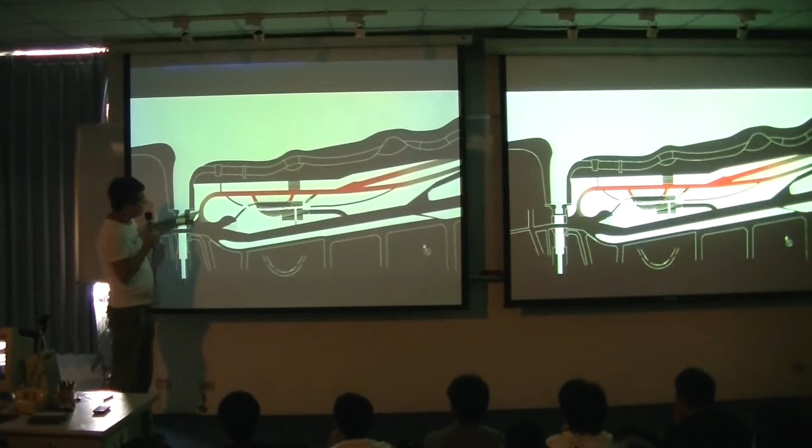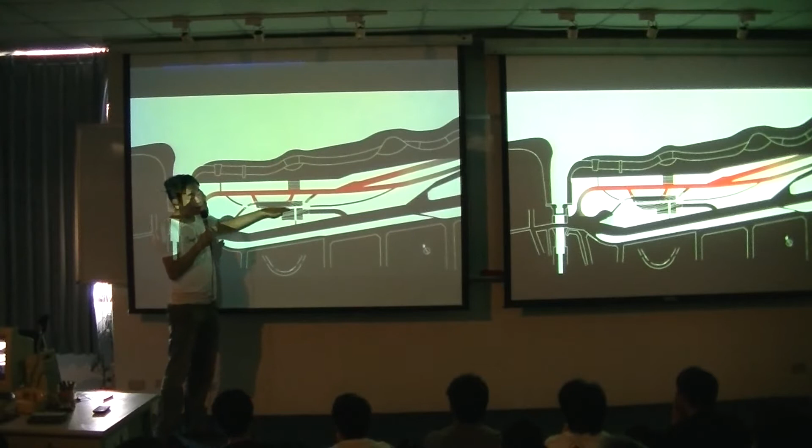My idea is, this is Kitakami River and this is Kitakami Canal. So my idea is that the building is like a tunnel. Usually a building is a box, but in this case the building is a tunnel in the ground. Our goal is to create a continuous experience.

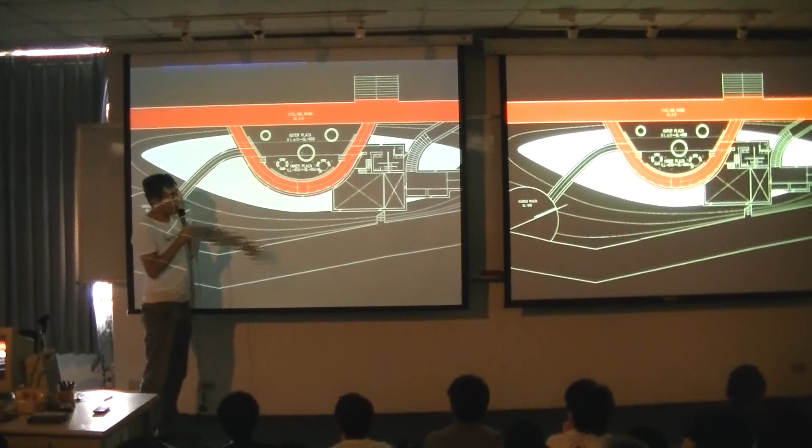This is the tunnel we designed. This is a section of Kitakami rivers as a town. This area was almost destroyed by the tsunami. This is the entrance to the building, though it is very difficult to find. This is the bottom of the tunnel.

I love the beauty of this place. In the Tohoku area, the still nature is existing. We designed very big windows, and half of the furniture is outside while half is inside. This is the view from the Kitakami River.

The next project is the water/glass villa in Shizuoka, 1995.

The beginning of the story is this wooden box, designed by a famous German architect named Bruno Taut. Do you know Bruno Taut? He came to Japan.

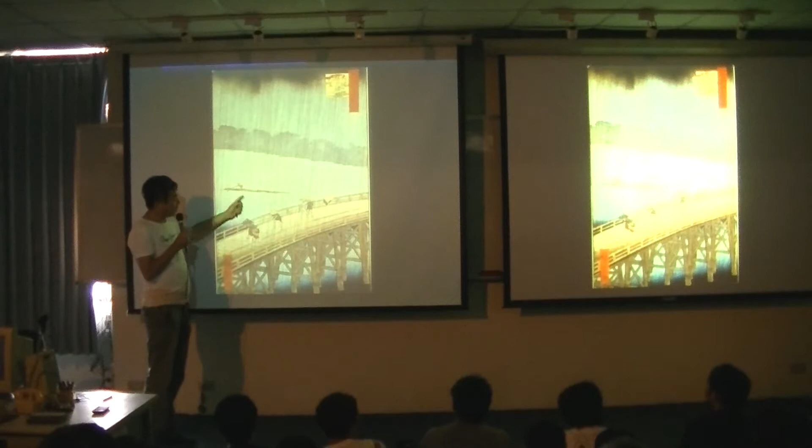The next project is the Hiroshige Ando Museum, completed in 2000. This is a masterpiece dedicated to Hiroshige, the ukiyo-e painter, and many artists wrote about his wood block prints.

One example is Vincent van Gogh, the Dutch impressionist painter, who wrote about Hiroshige and was inspired by him. He wrote that Hiroshige's method was very different from the Western method.

In the Western method, three-dimensional space is created by perspective drawing, but in Asian painting, three-dimensional space is created through layers of transparent, flat images. There's a big difference between Western painting and Asian painting.

Also, Frank Lloyd Wright, the famous American architect, was a collector of Hiroshige's wood blocks, and he learned the concept of transparency from Hiroshige. This is an example of how Vincent van Gogh traced Hiroshige's ukiyo-e painting.

In my Hiroshige Museum, I wanted to realize his idea of transparency, superimposed juxtaposed layers, that kind of thing.

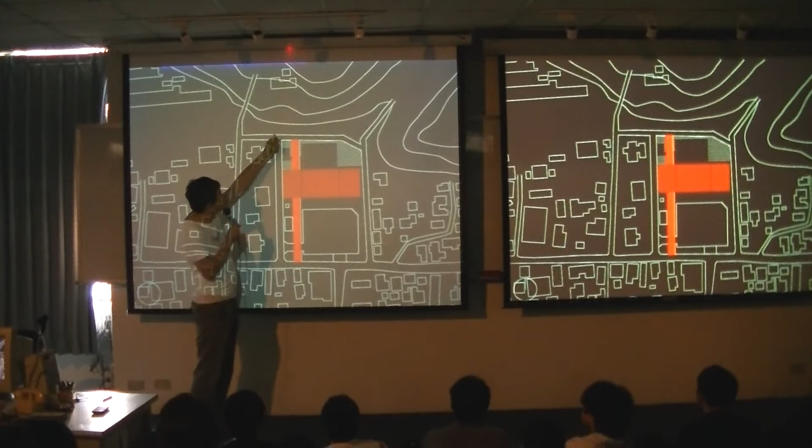This is the plan. This is the center of the village, and this is a mountain and a shrine. The village, mountain, and shrine used to be deeply connected, but in the 20th century that relationship was cut, and people forgot the existence of the shrine.

That's why we invited the vegetable market into the project.

Recently we wanted to adapt this method to a different context, the European context. This is a project in France, in Besançon.

This is the site with some existing buildings. Our proposal is to preserve the existing buildings and just add a wooden roof to cover the space.

The planning is very simple, similar to other projects. The main space connects nature and the city. The materials are local materials; in this case, it's wood from the forest.

FRAC Marseille is a contemporary art museum in Marseille. This is the site.

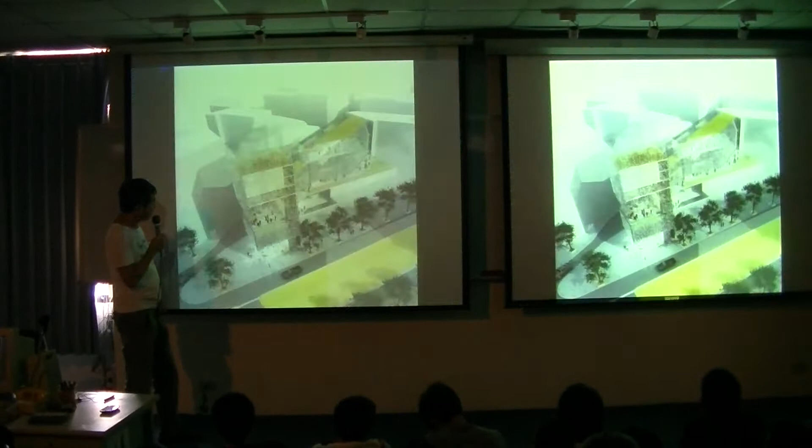Again, the material I found in the city of Marseille, in a factory. This is the material I found in the city - recycled glass. It's not expensive.

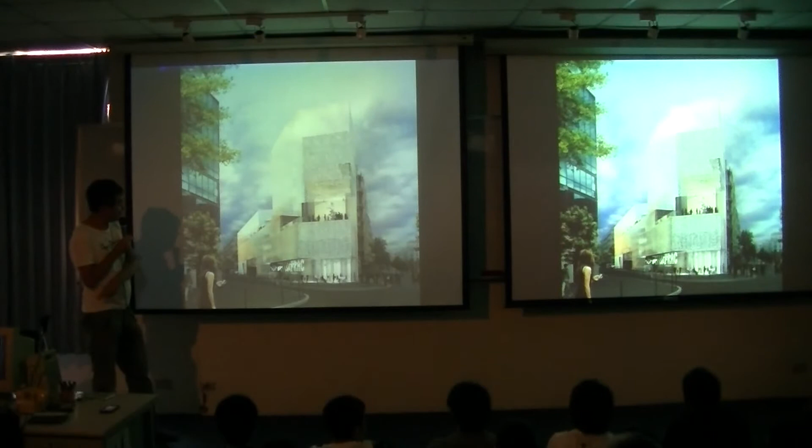The idea is very simple. The building is a vertical street, a spiral street, and that spiral street is covered by particles of recycled glass. This shows the spiral part.

Another material used, in an Italian project, is volcanic stone.

This volcanic stone is very soft, and if seeds of plants land on it, vegetation naturally grows from the stones.

This is a quarry, and the quarry itself is beautiful. I wanted to bring the beauty of the quarry into the building, and naturally people can get plants growing from the stone.

This is a structure made from the stones, and the Italian craftsmanship by the stone workers is really amazing.

Next is a project in Spain, Granada, a performing arts center - an opera house in Granada.

The inspiration came from the fruit. Granada is the name of the city, but at the same time it's the name of this fruit.

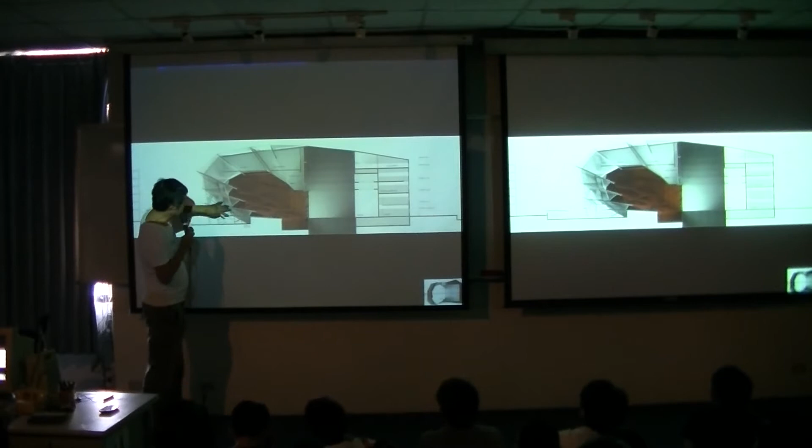These hexagon elements support the whole building and are exposed both to the exterior and the interior.

The basic idea is a 1,500 seat auditorium, where small spaces for 50 seats are combined together to create the full 1,500 seat auditorium.

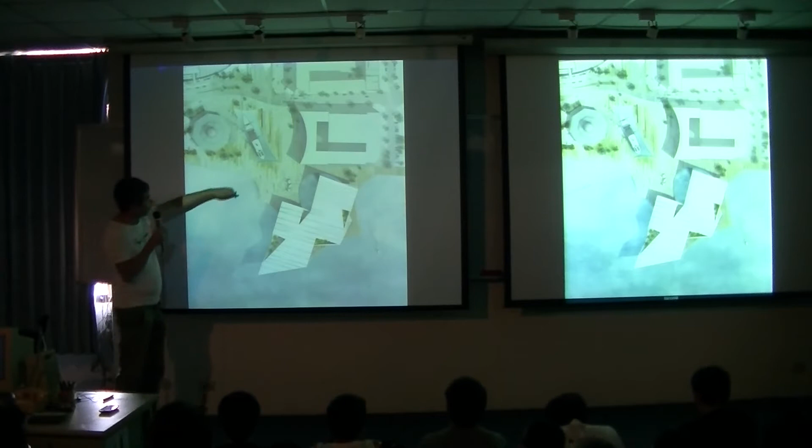The most recent project we won in Europe is the Victoria and Albert Museum at Dundee, Scotland. This is a first sketch, this is the site. The client is very ambitious, so they decided to use the river for the site of this project. This is a city, this is a river, so they chose this site.

Our idea is that the geometry of the building in the rivers should be different from the normal 90-degree geometry. This is again a hole, a void, which connects the river and the city. The same idea as the Busan project, and same idea as the Bamboo House and the Hiroshige project, all the same idea. The central void is the connector of the environment.

For the material, in this case, we are inspired by the masonry projects of Scotland. To use real stone is impossible, it's too expensive. So we use stone powder combined with precast concrete, and precast concrete forms the structure of this building.

This structure is exposed on the interior, and it is not decoration. This is the structure of the building itself, and it can be used as a bench and can be used for the stairs as well.

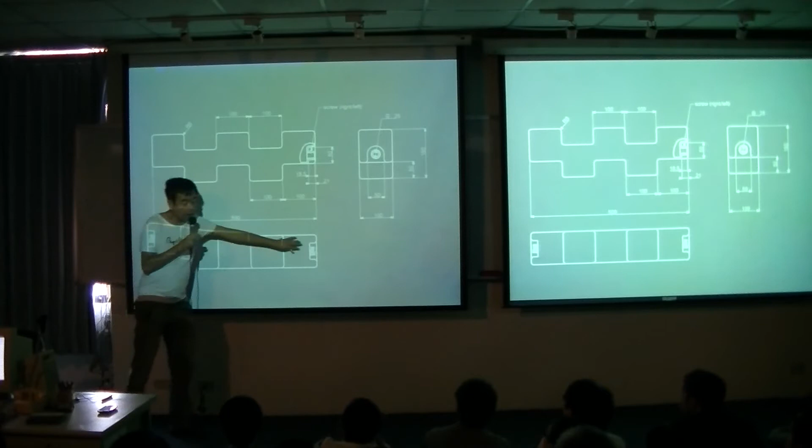The good thing about the water brick is it has two valves on both sides, so we can get water flowing into the pipe. That means the water flows into the wall and the floors. This is from the New York exhibition.

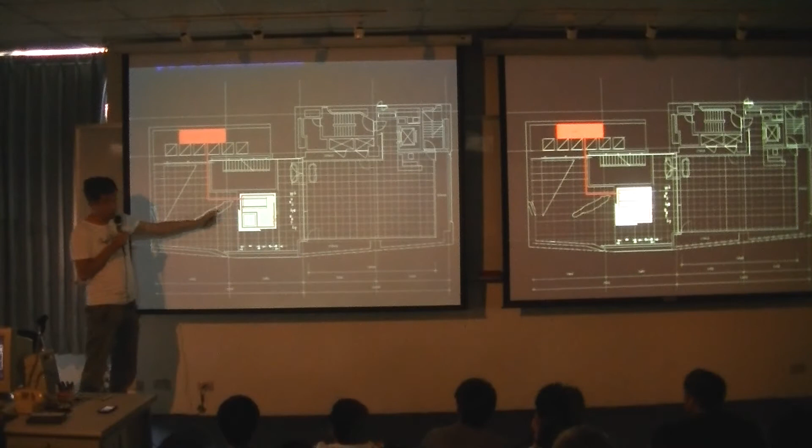Finally, we built this water brick house in Japan as an experimental house. It's a heat collector outside, and the water circulates into the house, into the walls and floors. Usually in a normal building, the structure is structure, the piping is piping, and the finish is finish. But in this house, the structure is at the same time the pipe, the water circulating space, and also the finish - it destroys the division of structure, finish, and piping.

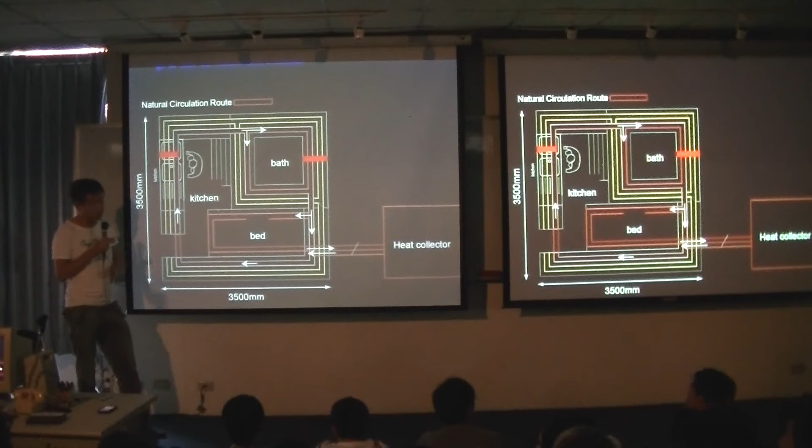Our students are working very hard. Each block is connected by these pipes. Finally, we build the house.

This is a kitchen, or we call it a kitchen. This is a bed. This is a bathtub, and these are the generators.

The idea is that this house does not rely on infrastructure. All energy can be created in this house - it is an autonomy house.

In Italy, the Italian people like experimental projects. They don't ask me for a real project, they ask for the experimental project.

The ceramic company asked me to design a monument in front of their factory. But at the beginning, I didn't like their idea, because their idea was like the Gaudi building - ceramic tiles with concrete structures, where the ceramic tiles are just a surface covering.

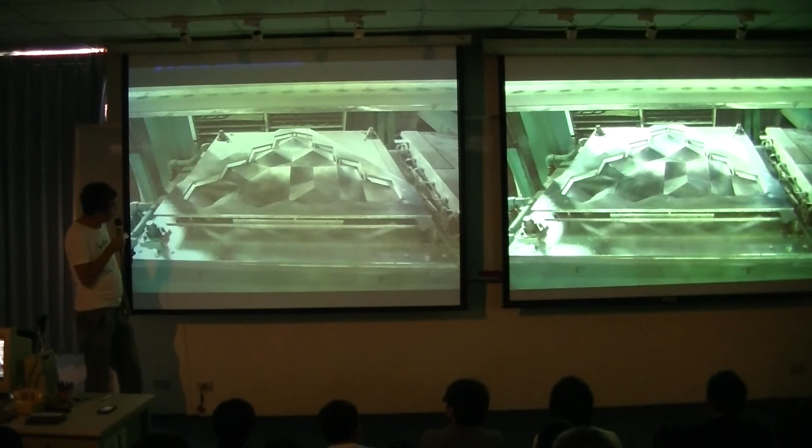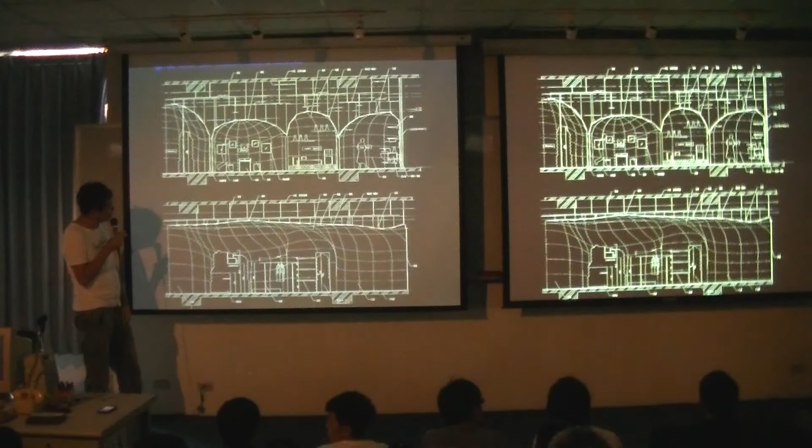This is a cast system, so we can get this shade and shadows.

So this is the real final project. This is something we did last month, these structures. The material is bubble polyurethane, usually used for insulation material.

Do you know this image? This is like Gaudi's structures, catenary structures. It's upside down - he created this catenary curve using weights, and then flipped it again.

The same idea was used for the domes. For these structures, the first step is a mesh suspended from the ceiling like that. The second step is we blew polyurethane foam onto the mesh. After it's fixed, we flipped it, returned it, and finally the dome was done. This is the structure of the dome.

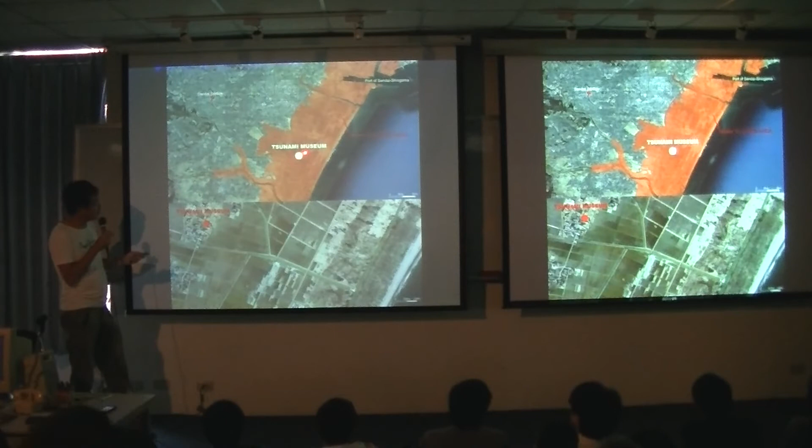The red shows the area where the tsunami caused great damage, and the museum project is here. The mesh is here, the gareki is here. And this is a kind of workshop space, for volunteers.

All structures and the gareki are fixed, will be fixed, using polyurethane foam. This is the final project, and next time I can show more, but today the time is limited. Thank you very much.

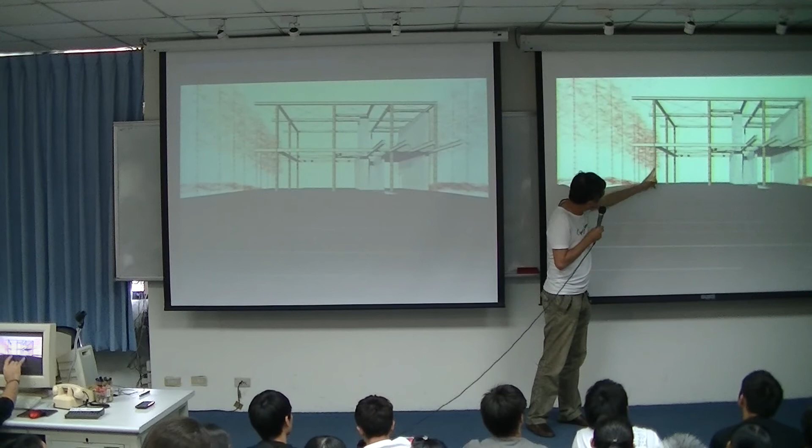So this is bamboo, and as you know, bamboo has those pillars, so we eliminate those pillars by using a special drill. We cut those pillars up, then put in steel, then put in concrete. This is only for the main structure. The diameter of the main structure is 15 centimeters—it's real bamboo.

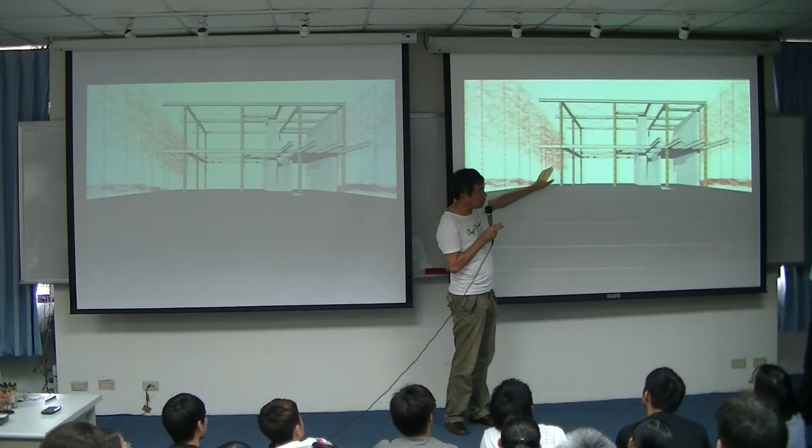So how long do you think this bamboo would survive? We want to protect it as much as possible. The eaves have at least 1.5 meters, but it's still not enough. Some part of the bamboo is exposed to the weather, and after it was completed 5 years, in 2007, we replaced some of the bamboo of this house. But the price of the bamboo is very cheap, so the replacement cost is almost nothing.